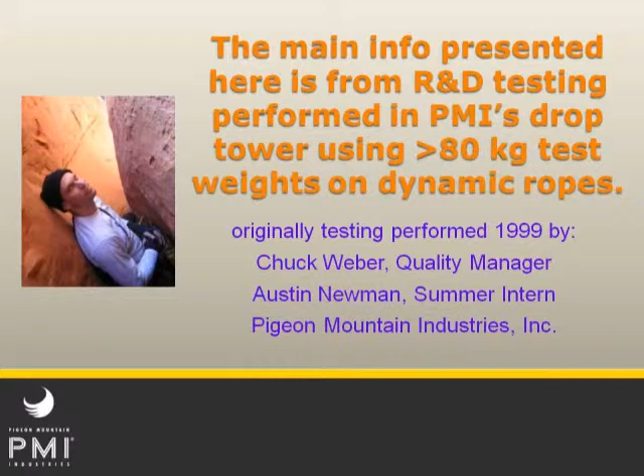Before getting into our results of the modified testing, or even the UIAA test details, let's touch on the practical limitations of testing textiles quickly. For every test ever invented, there's likely a host of critics, and this certainly applies to the UIAA drop test. Some say the test is not real world enough. Things like, I use a different knot. That's a rigid test mass. That's not a real belay device, etc.

You could debate there's some truth to all that, but at the same time, great care and precision is needed in order to get repeatable results when testing textiles. And the main purpose of lab testing is to ensure that the rope meets minimum safety requirements, the results are consistent between labs, and importantly, useful data is provided to the customer to help make informed buying decisions.

For example, look at humidity. 15% or 80% may be absolutely pointless if you're testing a carabiner, but when it comes to textiles and the performance of nylon ropes, it can make an appreciable difference, and it has to be controlled. So things like temperature, humidity, exactly how the knot is tied, preloading the knot, rest time, the rate of loading, all must be considered when testing textiles if you want to have reliable and repeatable results.

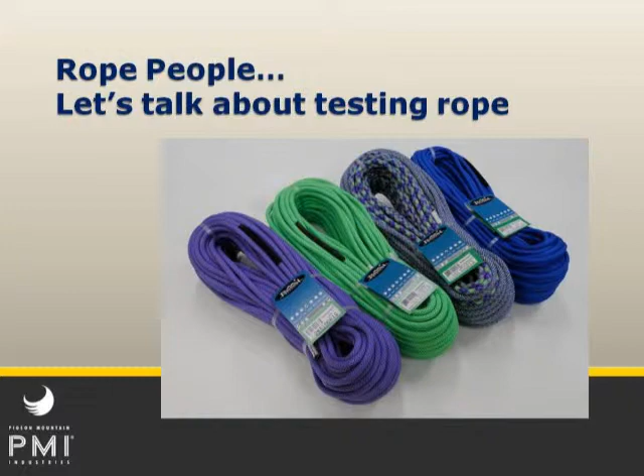There's currently open discussion in the UIAA Safety Committee to change the test method in the near future, but for right now, let's talk about the old test because it's still the test. Let's quickly recap the basics of the standard UIAA drop test for a single rope. This is by far the most common use and category. There's also half and twin, but I'd rather not go into those to keep this a little shorter. And it's not what we tested for this study.

We're also really just focusing on forces today. I'll make a few notes on elongation, but we're really just talking about the impact force. In a nutshell, the test rope is tied to an 80 kilogram mass. It's 176 pounds. It's pre-weighted to set the knot. And then you carefully position and anchor it as shown in the diagram. Then it's released from the high point for the free fall test. And fall factor in this case is almost the worst case climbing scenario of 2.0. The test configuration is technically a fall factor 1.71, and we'll look into this a little bit more in a moment.

During the first drop, both the impact force and the distance traveled, also called the dynamic elongation, are to be measured. Then the rope and test mass are returned to the starting point to rest. There's allowed 5 minutes between drops, and then the second drop is conducted. And all of the drop tests are simply pass or fail, except the first one where the force is measured. Simply said, when the rope breaks, the test is over.

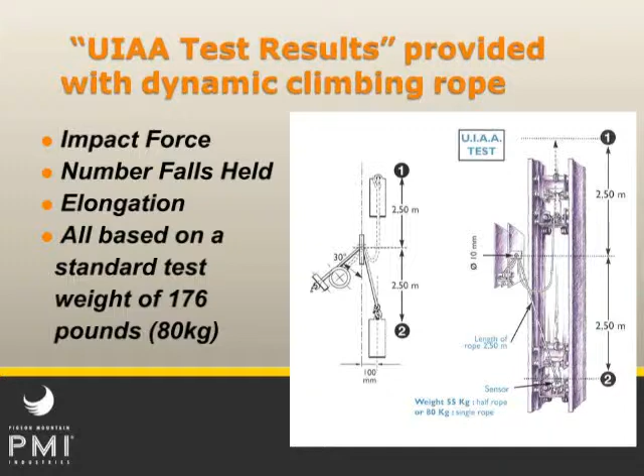PMI's customized basket design allows us to add additional metal plates to each side and secure them in place so we can do testing like this heavy climber series, and we can also get the basket up to 500 pounds when it's full on each side to evaluate rescue loads on different ropes, devices, and systems.

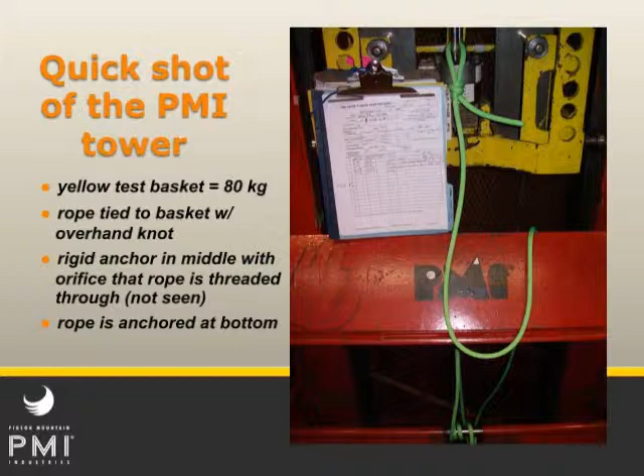When you think of the rope as an energy absorber, which is exactly what it is, it makes sense that when you have twice the length of rope, you have twice the capacity to absorb the energy of the fall. Hardware and slings can certainly hold these forces safely, but because they don't stretch, they simply don't absorb any of the energy of the fall. They sustain it, but they don't absorb it.

That's the rope's job. One important safety comment here is that a low stretch or static rescue rope should never be used or put to the test in these scenarios as shown, because it may not pass. Even if the rope didn't break, the forces would be much, much higher than allowed by the UIAA drop test, and somebody could get hurt or other gear is going to fail. The simple reason is those ropes don't stretch like dynamic ropes do. They become the weak link of the system.

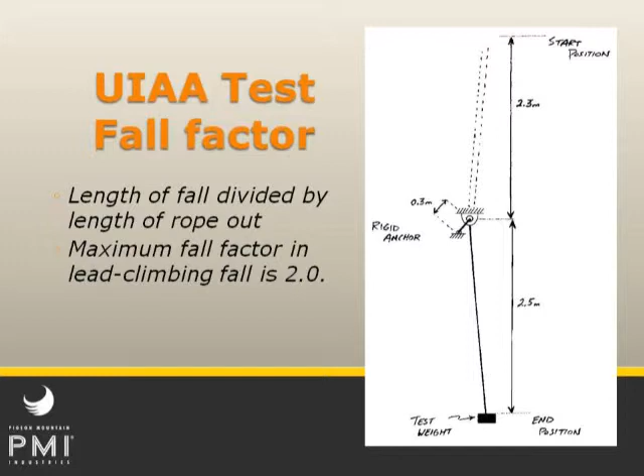The force felt in the climber's end of the rope transfers a virtually equal force back through the rope to the belayer's end. It's slightly reduced by friction, but we won't spend much time on that. The basic pulley effect comes into play when you realize the top anchor point, basically pulling upward, has to counteract 2 forces that are pulling downward.

So if you're at the upper limit, and if the climber feels 12 kilonewtons, and there's 12 kilonewtons on the other side of the rope, that's 24 kilonewtons that the anchor has to hold. And that's basically why slings and carabiners must be rated to 25 kilonewtons. They would fail.

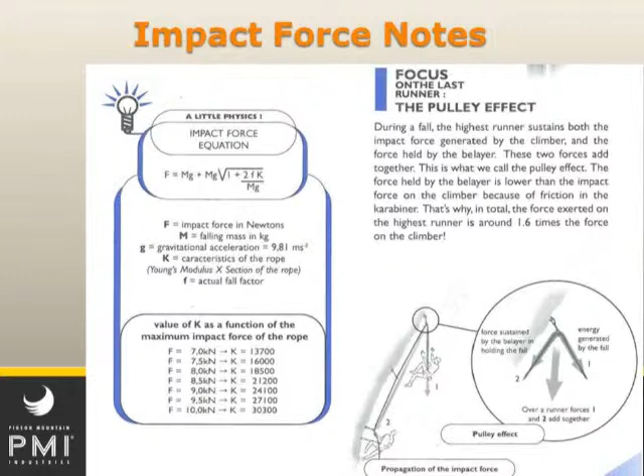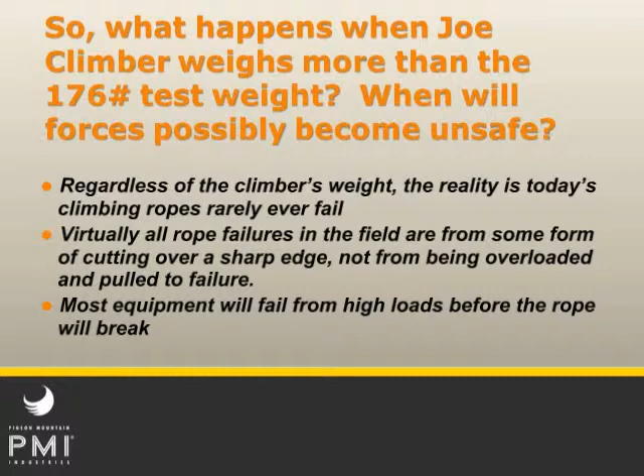Just for the record, here are the UIAA laboratory specs on the ropes used in this test. Important note that each test performed was with a new and unused section of rope from the same production line. I have an interesting thought and some numbers to share with you at the end on what happens after ropes are broken in perfectly normal use in lowers or rappels, and they're then required to catch a hard fall.

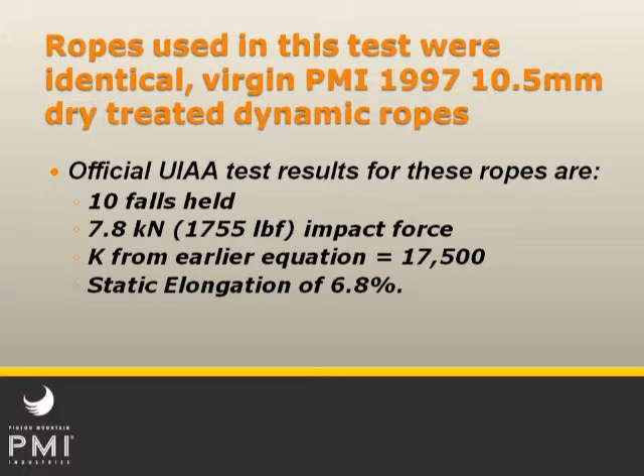So the basic plan was to load the new test weights and perform the first drop of the standard UIAA drop test. Then we'd load another rope, slightly decrease the length of the fall so that we were testing a lower fall factor. We'd continue like this with a new piece of rope for each test until we measured a force that was roughly equal to the initial force you got with the 80 kilogram test mass. Then we move on to the next higher test weight and keep going.

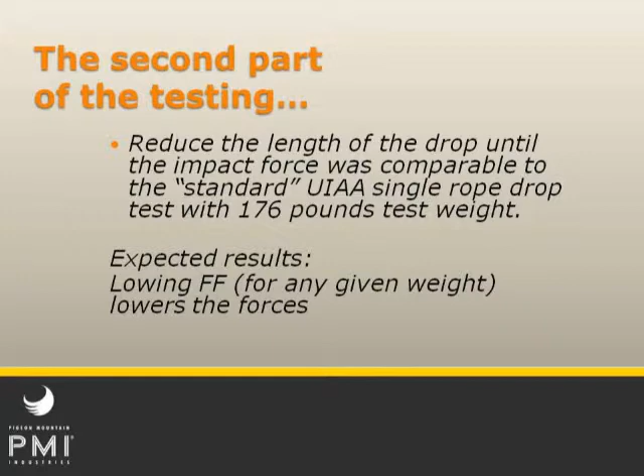Consider this example. Here's that standard test result again that we're comparing everything to. Here's what we got on one of the heavier test weights in the 1.71 fall factor. Another way to say it is we reduce the length of drop from 4.8 to 3.4 meters, and we get the same impact force. That's also saying the force of 176 pounds and fall factor 1.7 is equal to the force of a 225 pound test weight and fall factor 1.2. I personally like this one because that's close to what I weigh toting all my gear.

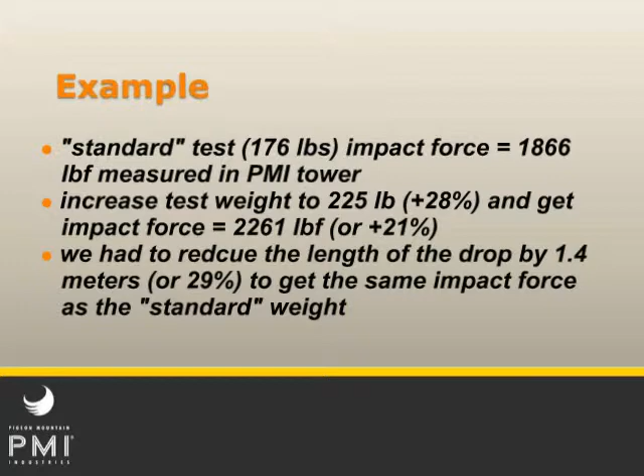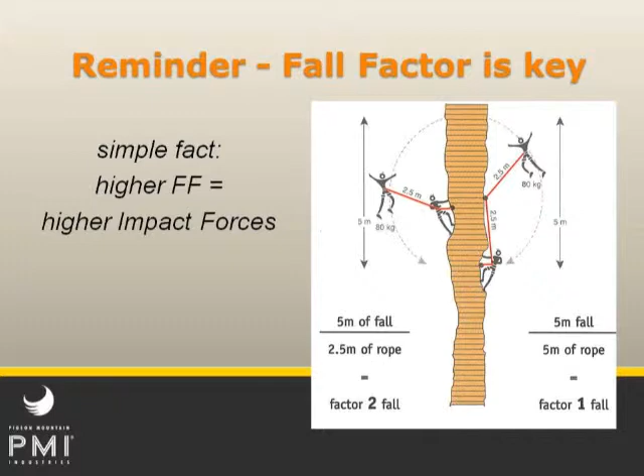Okay, this isn't exactly rocket science, but it's always a good idea to prove that formulas work in the lab, and in this case they did. We're glad to say that of the 39 drop tests performed for this project, the formulas shown earlier produced results that were always within 10% of the measured value, and 12 of those 39 were even within 2% of the predicted value. Reminder of this simple fact: regardless of the test weight, of course, the higher the fall factor, the higher the force.

So here's basically the graphical representation of all 39 drop tests. Every test we performed is a dot on this chart. The y-axis, going up and down, is the impact force measured at the climber's end of the rope. The x-axis in this graph is fall factor. So basically, there's a dot for the 176 pound test weight, where the 1.71 fall factor and 1866 pounds would intersect, in the bottom right corner. It's just not shown on this slide.

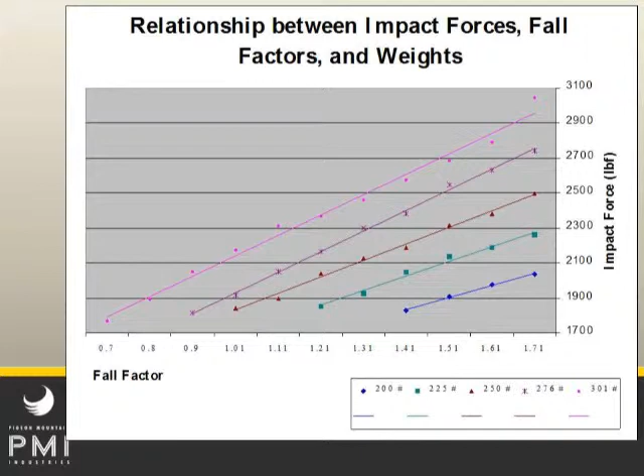If you start there, then you'll see the next line up has 4 dots. It's the blue line. That's for 200 pounds. And then the next line above that is the green one. I'm sorry, you progress up through the weights, you can see the tests we did. And then the highest test weight we did was the pink one at 300 pounds.

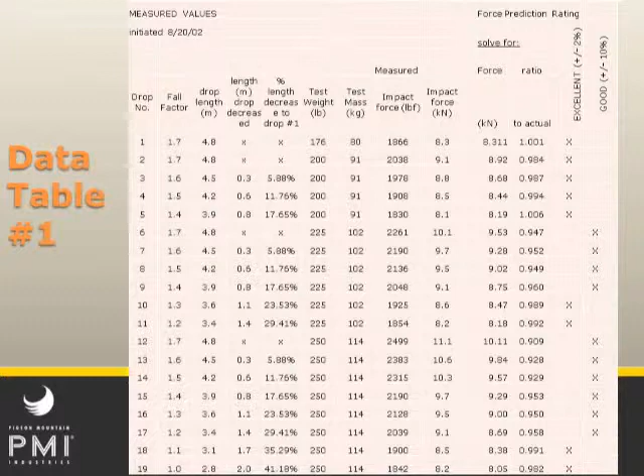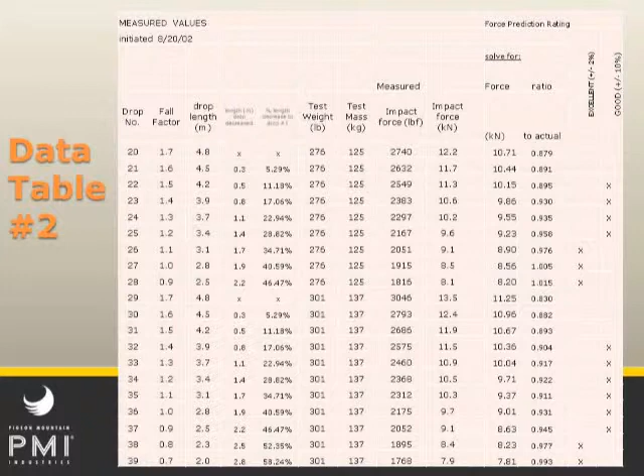So after we conducted those 39 tests, at a later date, we wanted to take a closer look at the elongation on certain test scenarios. Not all 39, just the ones you see above. And those results are shown in the slide. Of course, it's simple to say that the higher the weight and force, the more the rope will elongate. But this puts some actual percent elongations with certain weights and fall factors if you're interested.

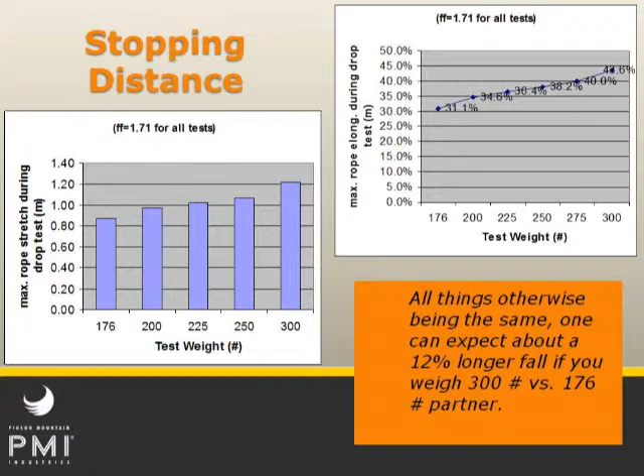Of course, all these tests were performed on new pieces of dynamic rope. And in real-world scenarios, the ropes will surely have been used for days, months, or even years before ever being subjected to a serious fall, like you're seeing demonstrated in these tests. There's so many varied scenarios on how ropes are used and abused. It's virtually impossible to predict how much strength will be lost or how long the rope will last. Too much depends on how severely it's used. A rope can be destroyed on its first outing, or it can deliver many years of reliable service.